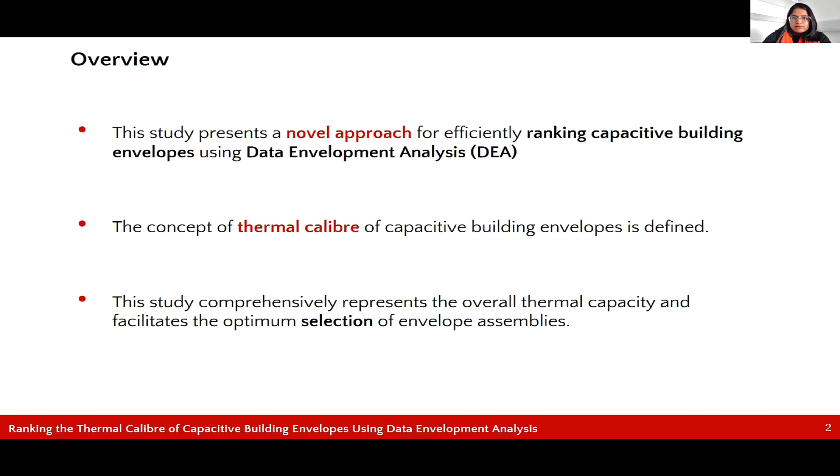The building envelope acts as an interface between the outside and the inside, and both aspects of resistance and capacitance of the material layers impact the building performance.

High thermal mass materials are known to be effective for locations where the daily temperature difference is greater than 10 degrees centigrade, where an alternate phenomena of heat gain and heat loss occurs at the building interface.

The advantages of high thermal mass have been presented by previous studies: Balaras in 1996, Childs in 1997, and Yang and Li in 2008. These are basically in terms of reduced temperature fluctuations, reduced loads, and reduced need for cooling.

Previous researchers have also tried to quantify the thermal capacity of envelopes and introduce them in thermal performance assessments, such as the Dynamic Benefit for Massive Systems (DBMS), which describes envelope performance in terms of climate and material configuration. This was presented by Kossecka and Kosny in 2002 and 2015 using US building assemblies.

The second study was Mass Enhanced R-value, also used in the Building Code of Australia, which describes the ratio of R-value for massive constructions for a specific load compared to the R-value in a specific location.

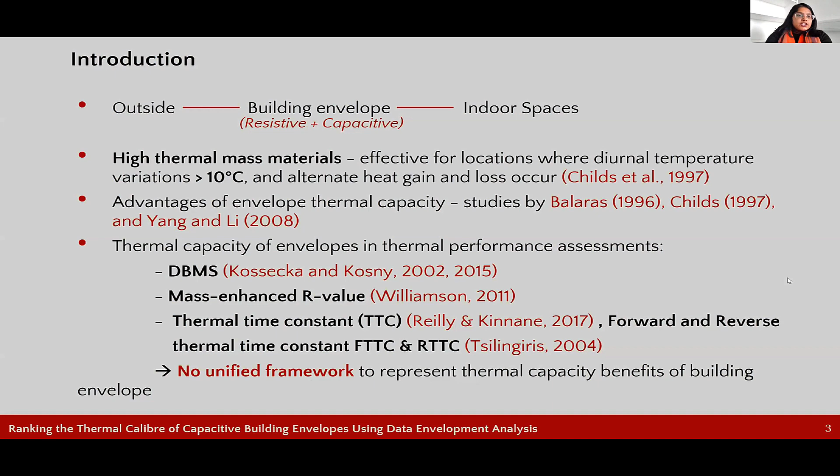In my work, I have performed this study for Ahmedabad, India, located at latitude 23.04 degrees north and 72.46 degrees east. This is classified as BSh, hot semi-arid steppe climate, according to the Koppen climate classification.

In order to capture the seasonality in the weather data, a two-step clustering was done based on the daily maximum temperature, daily minimum temperature, and global horizontal irradiance, using the typical meteorological year ISHRAE data. Four clusters were obtained, and the clusters are fairly balanced, as can be seen from the cluster sizes and the different values for the considered parameters.

Also, from previous studies, we know that thermal mass is not beneficial in colder climates. So clusters representing cooling dominant days are used for the study, which are clusters 1, 2, and 3, and cluster 4 is not used in the study.

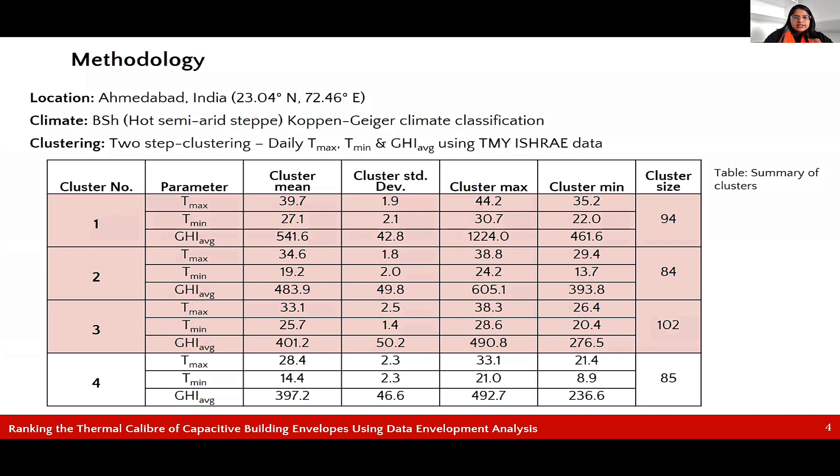In order to do the simulations, we needed a model. A 9-meter square room was modeled, with 2 windows on 2 adjacent surfaces with a window-to-wall ratio of 10%. The window is 6mm clear glass. The software used for modeling was ESP-r, and the room is naturally ventilated.

A fluid flow network was modeled to represent the airflow pattern based on the ambient air velocities. A room flow node was considered, which was connected to the outside node through the fenestration components, and the ambient air velocity was used as the inflowing air component.

Windows are supposed to be open when the outside temperature is greater than 28 degrees centigrade, and otherwise they remained closed. So 4 scenarios were considered, basically single exposed scenarios. For each simulation, only one facade was considered as exposed, and all other surfaces were considered adiabatic. The facade considered as exposed had a window. The figure on the right shows the configuration of the model for the south orientation.

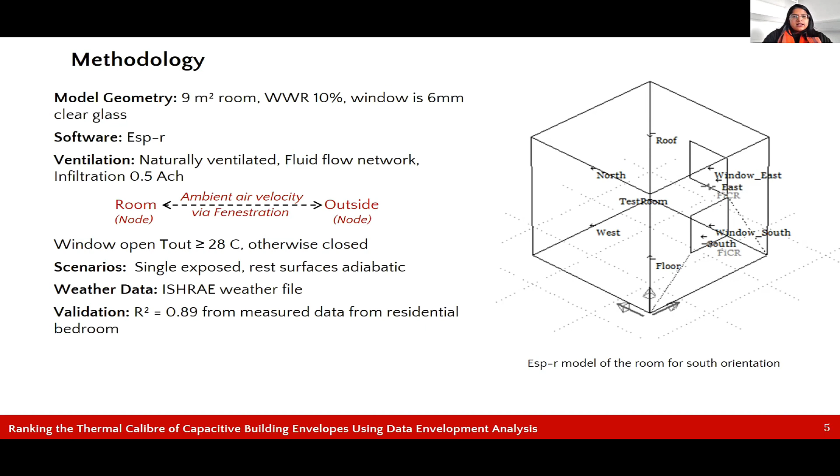We considered a 300 mm wall, divided into 3 layers of 100 mm each, and each of these 3 layers can take up materials. We also considered 3 materials, which were selected from existing construction materials used in Indian construction of residential buildings.

These materials correspond to high and medium thermal mass materials. The properties of these materials are shown in the table. Material A corresponds to a high thermal mass material, while materials B and C correspond to medium thermal mass materials. When we consider the envelope as 3 layers of 100 mm each, we get 27 possible cases, since each layer can take up any of the 3 materials. Possible cases include AAA, AAB, AAC, and so on, giving a total of 27 cases.

For these 27 cases, we get a thermal transmittance, or U value, range of 1.76 watt per meter square Kelvin going up to 3.03 watt per meter square Kelvin, and a TTC range of 22.11 to 35.88 hours.

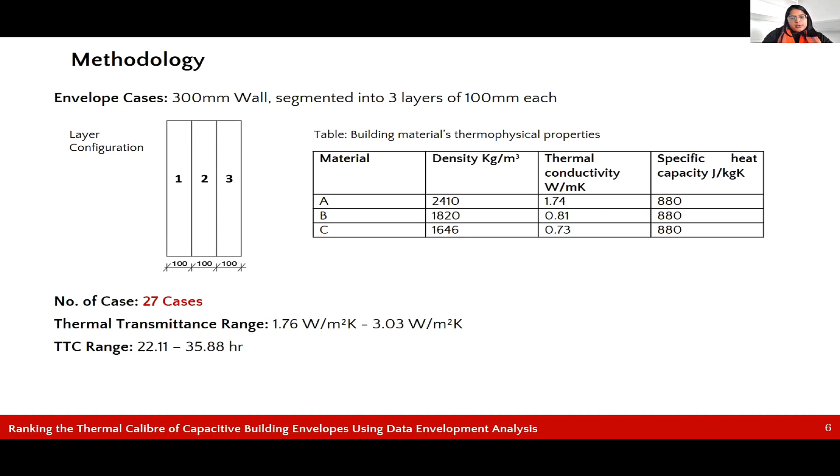Data envelopment analysis, or DEA, is a non-parametric, non-statistical mathematical model which uses linear programming to measure the relative efficiency of decision-making units. Basically, decision-making units are the units which are considered for ranking.

What DEA does is basically assign weight to each of the inputs and outputs, and the inputs and outputs are selected by us based on the criteria on which they are supposed to be ranked. Efficiency is defined for each DMU as the ratio of weighted outputs to weighted inputs, and it can lie between a range of 0 and 1, with 0 being least efficient and 1 being most efficient.

The thermal caliber for building envelopes is defined as the ratio of envelope performance, resistive and capacitive, on a particular day to its best performance in the year.

Using DEA, we have the advantage of comparing the performance of a material on a given day to its performance in the year, and comparing the performance of an envelope on any day to the performance of other envelopes on other days. In that sense, we can compare the performance of different envelopes on different days within each other, giving us a relative ranking for these envelopes.

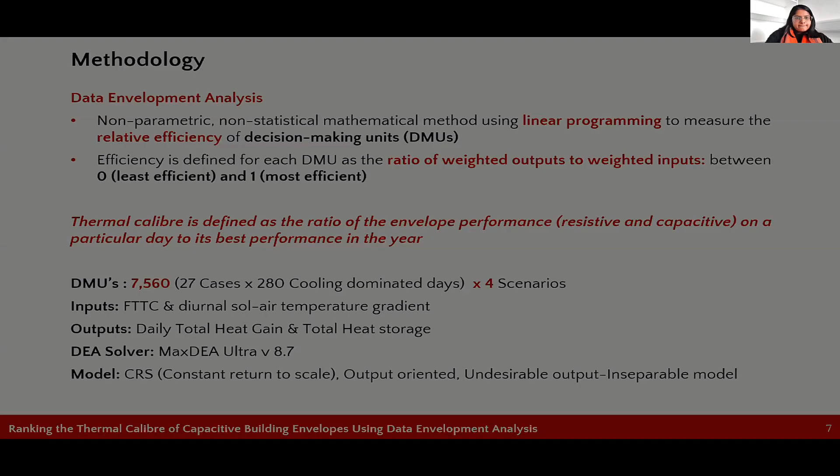So the methodology in a nutshell is basically clustering of weather data based on daily Tmax, Tmin, and global horizontal irradiance to get the cooling dominant clusters.

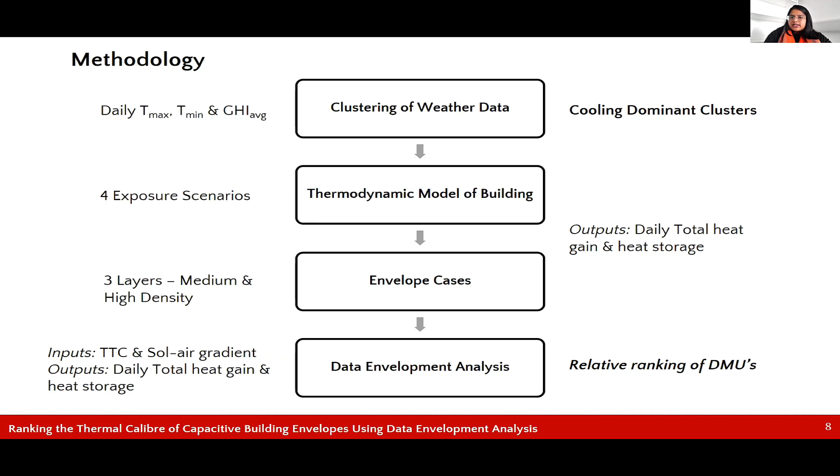Then modeling the thermodynamic model of the building for the 4 different exposure scenarios, and simulating the developed model for the 27 envelope cases, developed based on 3 layers corresponding to medium and high density materials, to get the outputs, which are then used in the data envelopment analysis to get the relative ranking of DMUs.

So also the effective position of thermal mass is important when we consider the capacitive envelope. For envelopes which have the same thermal transmittance, which is so because we made cases based on 3 materials, a lot of cases have the same U value.

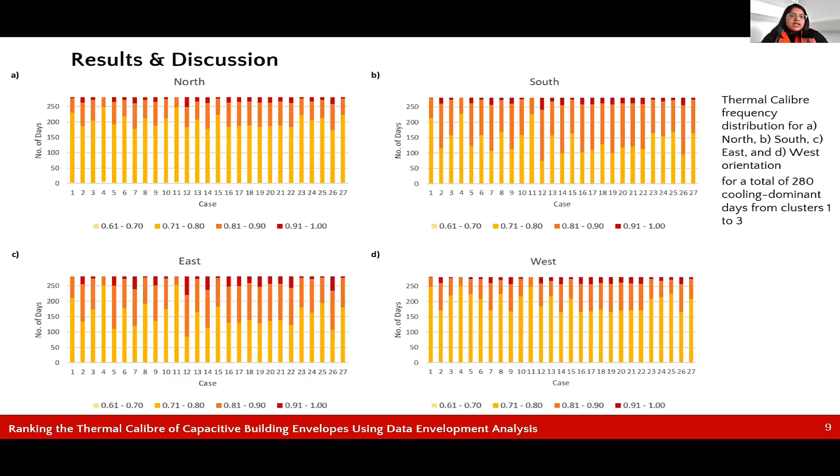For example, case 3, 4, and 5 have the same thermal transmittance or U value. But we see that case 5 performs much better in comparison to case 3 and 4, primarily because case 5 has a higher external thermal mass composition.

This is because high thermal mass materials absorb the heat entering the building, hold the heat, and then release it back outside. But if the external layers are made up of low thermal mass materials, the layer is going to saturate and will allow the heat to go inside.

Also, when a high thermal mass layer is sandwiched between medium mass layers, it performs better because the middle layer will absorb heat and hold it for some time before letting it inside. This is contradictory to when a medium mass layer is sandwiched between 2 high mass materials, which performs poorly, as seen in certain cases. You can read more about these cases in the paper.

Now, next we look at the pixel chart, which shows the efficiency of the envelope for the year.

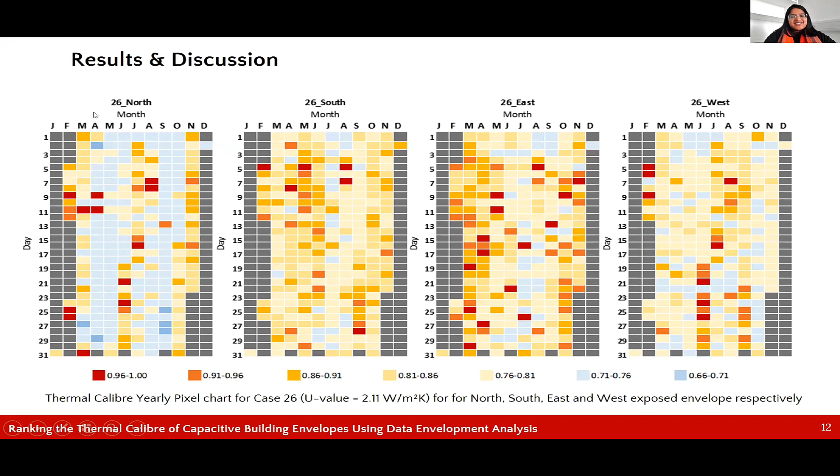Yes, so in conclusion, we have looked at the thermal storage capacity, which is often a neglected factor in building performance assessments. Building performance, being dynamic in nature, is influenced by layer configuration, material properties, and envelope orientations. These are all considered in the thermal calibre calculations, which give due respect to thermal resistance as well as thermal storage. Also, the efficiency of building envelope varies for different orientations, and it is not a constant value but a dynamic one, as seen by the efficiency values throughout the year.

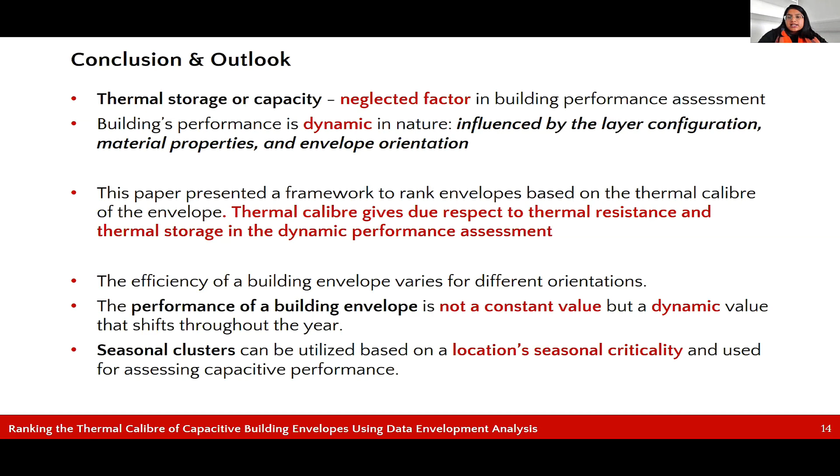Seasonal clusters can be utilized based on a location's seasonal criticality. So if the study is extended to other locations, you can focus on certain seasonal clusters which are more critical for that particular location for assessing the capacitive performance. Thank you, and sorry for extending the time.

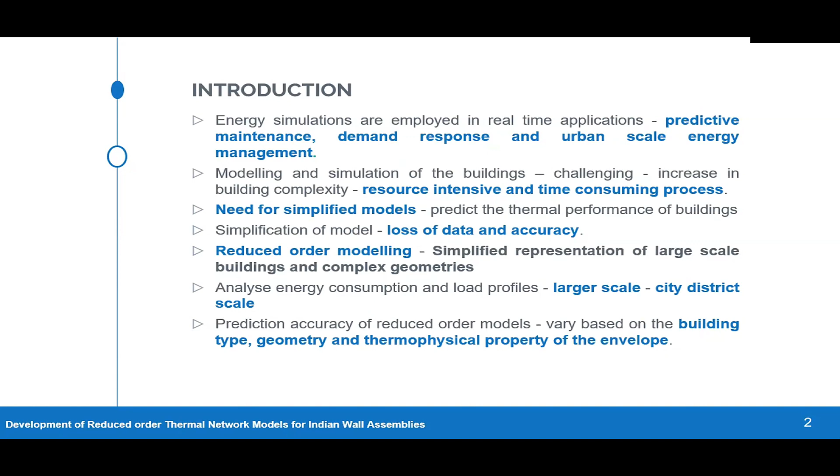One promising solution is reduced order modeling, which is basically a simplified representation of large-scale buildings and complex geometry. It helps us analyze energy consumption and load profiles at a larger scale, such as city or district scale. Prediction accuracy of reduced order models may vary based on the building type, geometry, and thermophysical property of the envelope.

The study presents an application of reduced order models, particularly thermal network models, for a residential building considering 3 alternate wall assemblies. The objectives are to develop a validated thermal network model of a building and evaluate its application for 3 different wall assemblies, and to present the effect of model order reduction on prediction accuracy. The study is limited to thermal network models of 3 widely used assemblies in India: aerated concrete, brick, and rubble masonry.

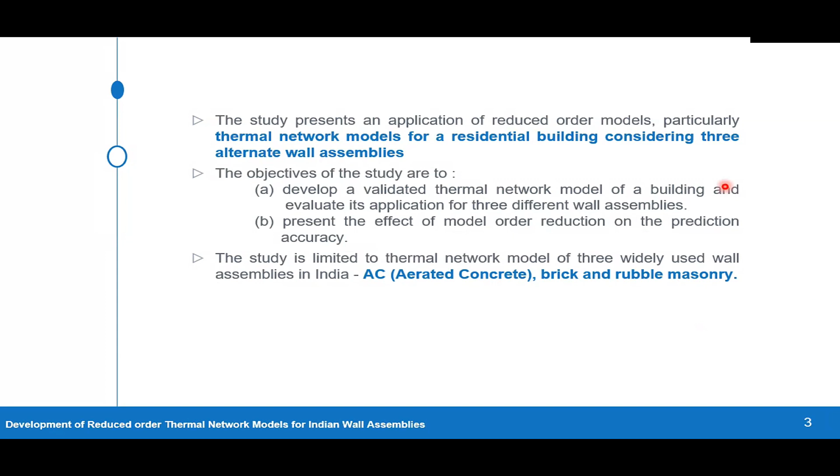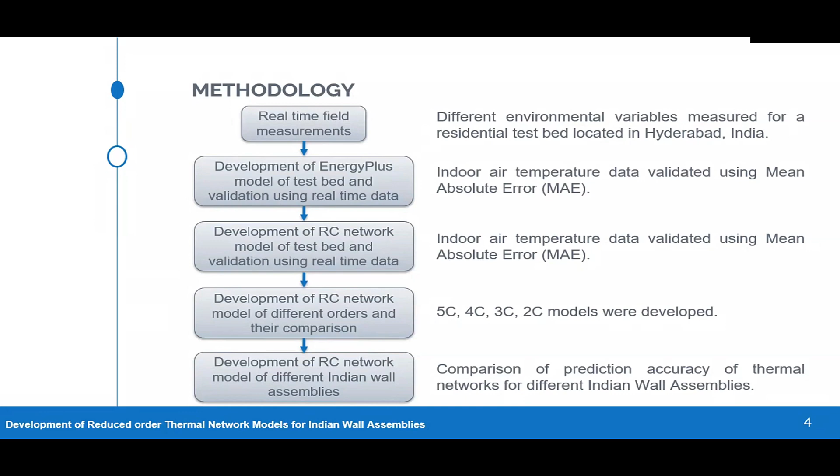The methodology adopted for the study is as follows. First, we did real-time field measurements for a test bed located in Hyderabad. Then we developed an EnergyPlus model of the test bed and validated it using real-time data. Then we developed an RC network model of the test bed and validated it using real-time data. Then we developed RC network models of different orders and compared their prediction accuracy. Finally, we developed an RC network model of the entire test bed for 3 different Indian wall assemblies.

So what are reduced order models? They are basically a simplified version of complex models. They require fewer input parameters and consider the effect of all the dominant parameters while neglecting the others. This significantly decreases the time involved in solving the differential equations.

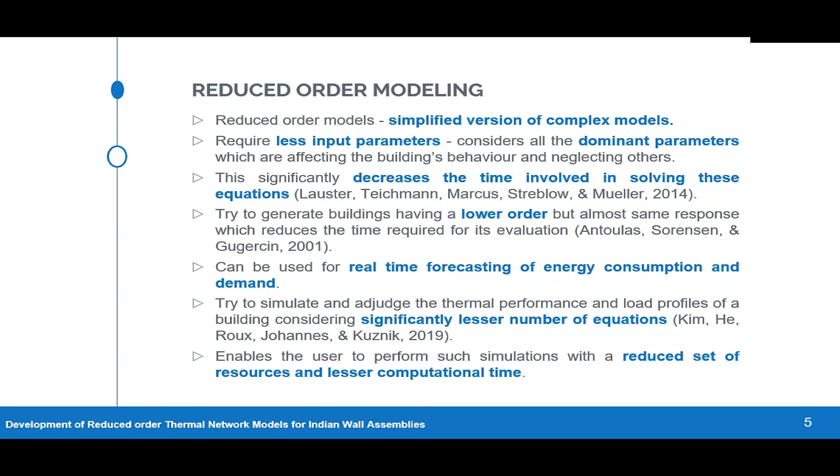They try to generate buildings having lower order but producing almost the same response, which reduces the time required for evaluation. They can be used for real-time forecasting of energy consumption and demand. They try to simulate and adjudge the thermal performance and load profiles of a building considering significantly fewer equations, enabling the user to perform simulations with reduced resources and lesser computational time.

Thermal networks or RC networks are a type of reduced order model which consider a building element such as wall, window, roof, etc. to be broken down into a number of elements, assuming they have a uniform temperature throughout. The number of such elements is usually kept small so that the order can be reduced. Thermal networks represent these elements using a series of resistors and capacitors.

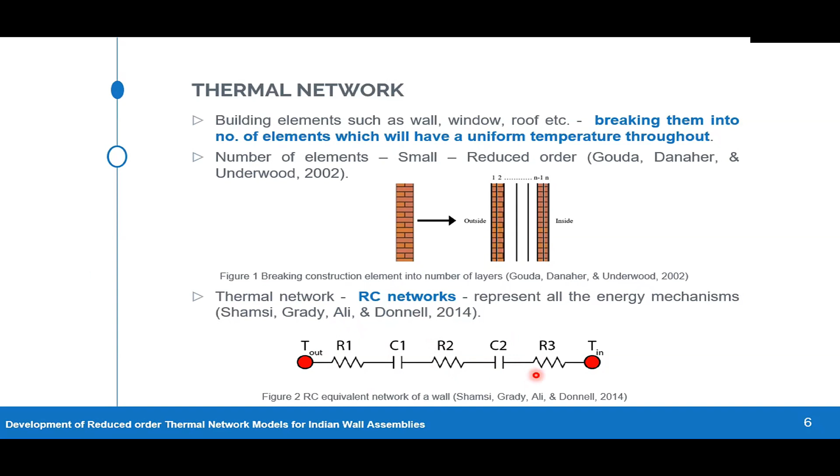Figure 2 represents a thermal network diagram of a wall, considering the wall has been broken down into two layers. R1 represents the resistance offered to the wall due to outside convection. C1 represents the thermal capacitance of the first layer of the wall. R2 represents the resistance offered due to conduction of the wall. C2 represents the thermal capacitance of the second layer of the wall. And R3 represents the resistance offered due to inside convection.

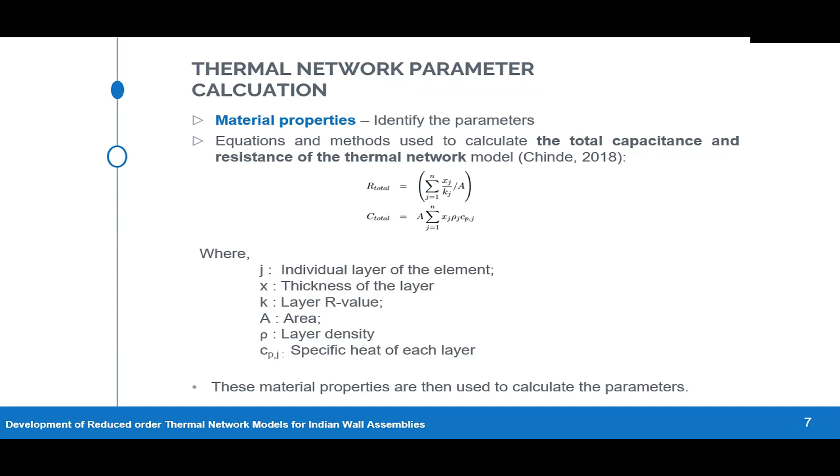The parameters of the thermal network model are usually calculated using material properties. It considers the thickness of the layer, the layer's R value, area, layer density, and specific heat capacity of each layer.

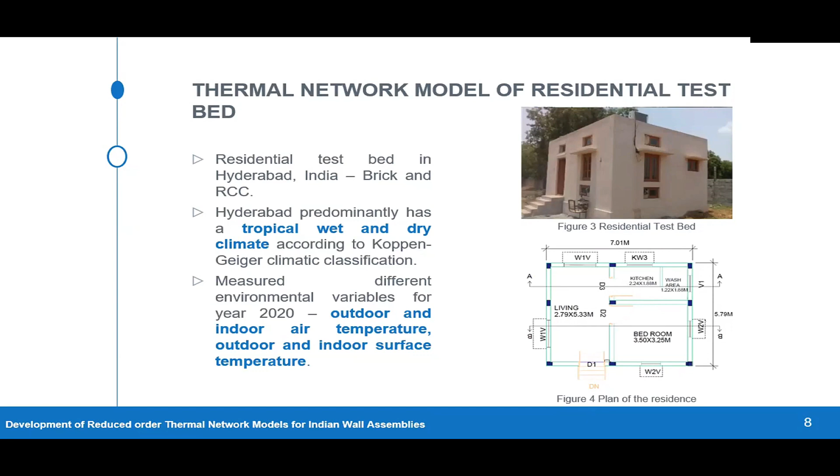Then what we did, we developed a detailed EnergyPlus model for the residential testbed, took one room, and tried to validate it by tuning the parameters. It yielded a mean absolute error of 0.82 degrees Celsius.

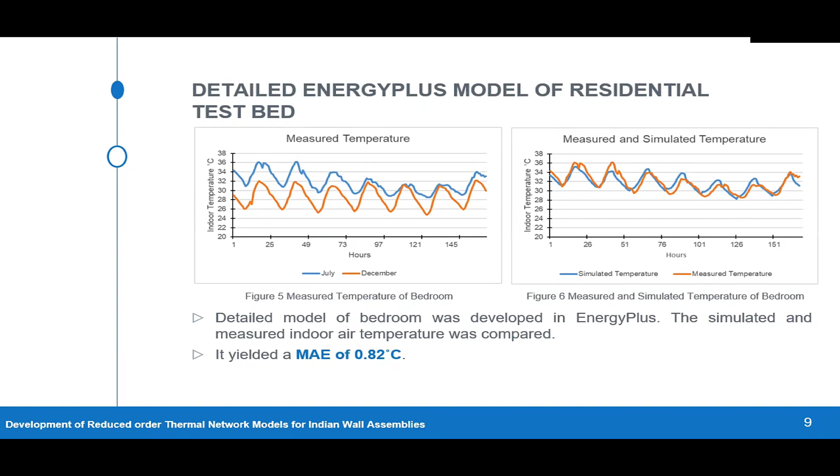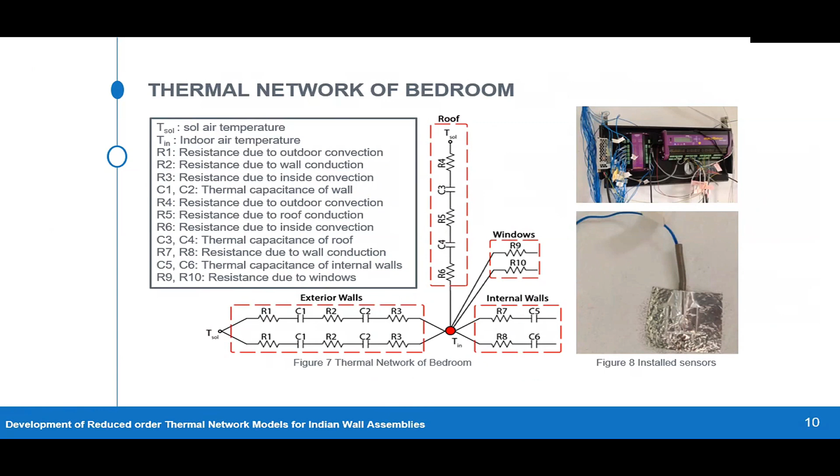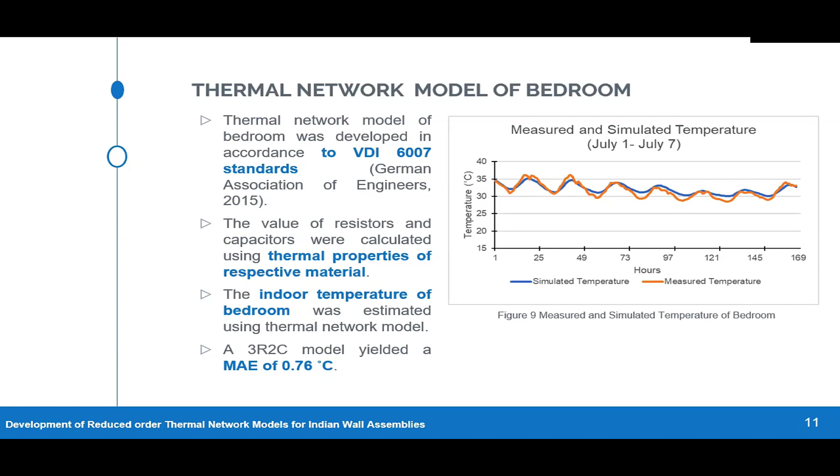Thermal network model of the bedroom was developed in accordance with VDI 6007 standards. The values of resistors and capacitors were calculated using thermal properties of the materials used in the testbed. So what we did, we basically tried to use the RC network to simulate the indoor air temperature of the bedroom, using a 3R2C model or second order model, and compared the simulated RC network temperature with the measured temperature. The model yielded a mean absolute error of 0.76 degrees Celsius.

An attempt was made to develop a thermal network model for the entire testbed for different Indian wall assemblies. So basically what we do is try to construct an RC network model for the entire testbed to simulate the indoor mean temperature. We considered 3 wall assemblies and models of different orders, which were 2C, 3C, 4C and 5C.

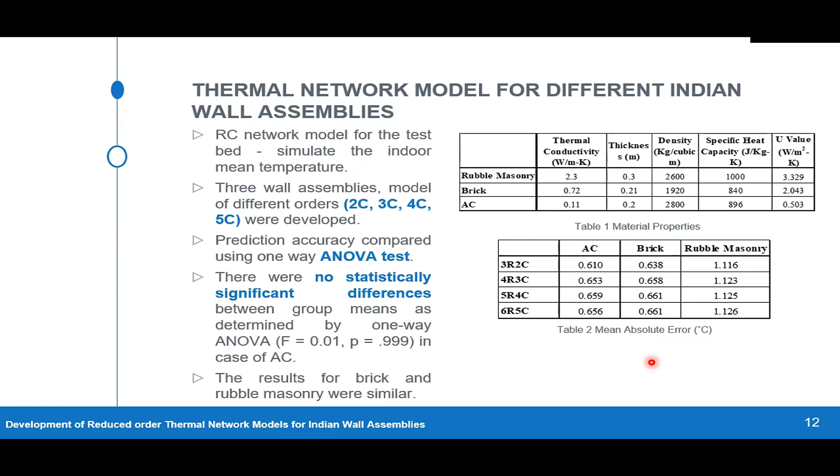Prediction accuracy of these different model orders was compared using one-way ANOVA tests. However, we found there were no statistically significant differences between group means, as determined by one-way ANOVA, in case of aerated concrete. The results for brick and rubble masonry were also found to be similar.

Then we developed an RC network model for the entire testbed considering aerated concrete wall assembly. For this we used a second order model, that is a 3R2C model. Then we tried to compare the thermal network model and the detailed model indoor air measurements. We saw that it yielded a mean absolute error of 0.61 degrees Celsius.

Then we tried to develop a thermal network model for the testbed considering brick wall assembly. Here also we used a 3R2C model, or second order model. We compared the indoor simulated temperature in case of the detailed model and the RC network model. When we compared, it yielded a mean absolute error of 0.638 degrees Celsius.

Now we try to develop a thermal network model considering the test bed to be made up of rubble masonry. Here also we used a second order model, or a 3R2C model. We tried to compare the simulated indoor air temperature using the thermal network model and the detailed model.

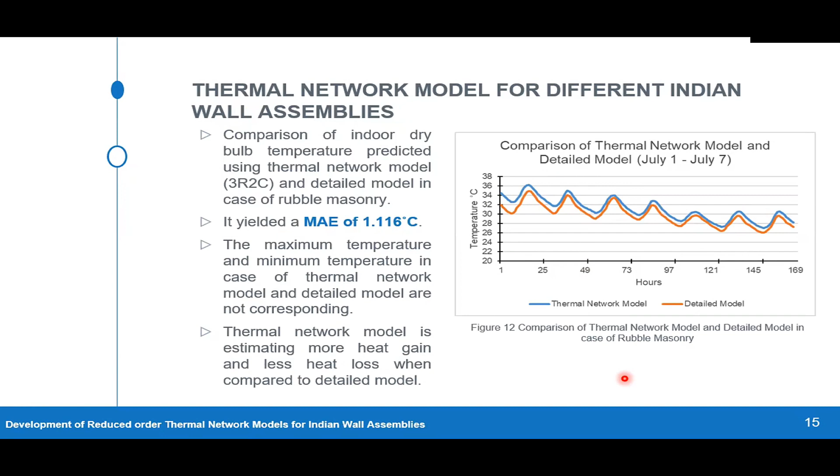We saw that it yielded a mean absolute error of 1.116 degrees Celsius. We can see from the graph that the maximum and minimum temperature in case of the thermal network model and detailed model are not corresponding or matching. Also, we can see that the thermal network model is estimating more heat gain and less heat loss when compared to the detailed model.

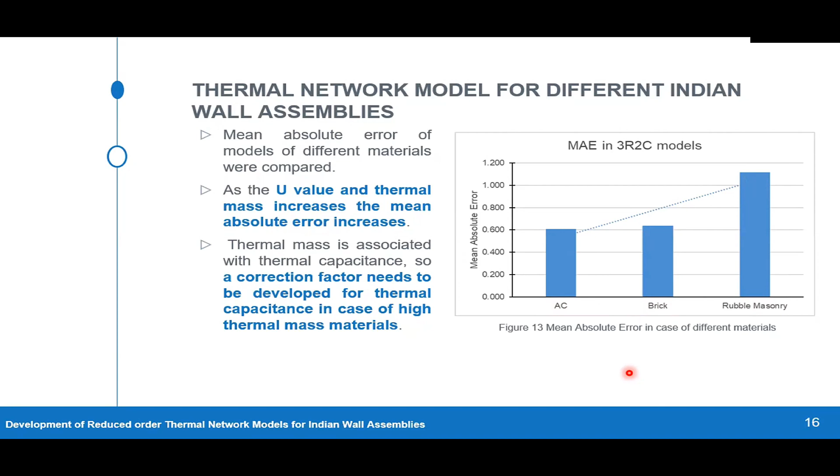Finally, what we try to do is compare the mean absolute error obtained by considering different kinds of wall assemblies. We can see that as the U value and thermal mass increases, the mean absolute error also increases. So we can say that the thermal mass is associated with thermal capacitance. Some kind of correction factor needs to be developed for thermal capacitance in case of high thermal mass materials.

Concluding the presentation, this study presented the thermal network model of three widely used Indian wall assemblies, which are aerated concrete, brick and rubble masonry. The thermal network model of the test bed was developed and validated, yielding a mean absolute error of 0.76 degrees Celsius. The mean absolute error of the second order thermal network model for the three wall assemblies ranged between 0.61 to 1.116 degrees Celsius.

The prediction accuracy of different orders was tested. No significant difference was found for the test bed under consideration; however, significant difference might occur with increase in building complexity and scale. The prediction accuracy of the thermal network model decreased with increase in U value, and was higher for low thermal mass materials compared to higher thermal mass materials. Further work is required to investigate composite wall assemblies and complex building geometries.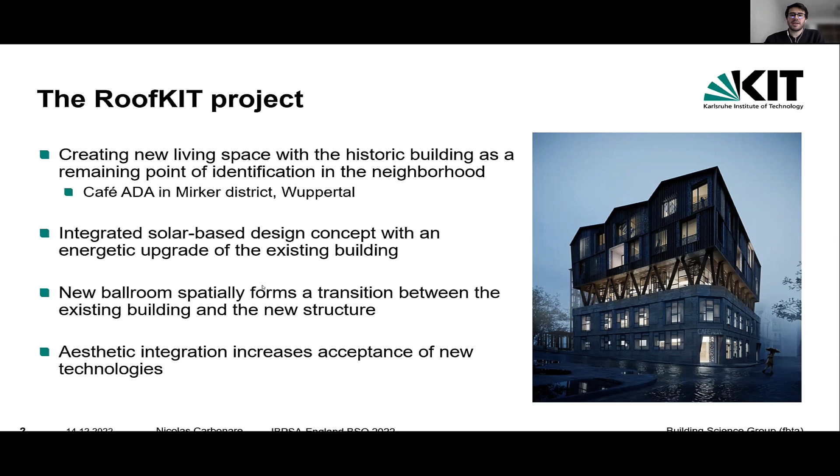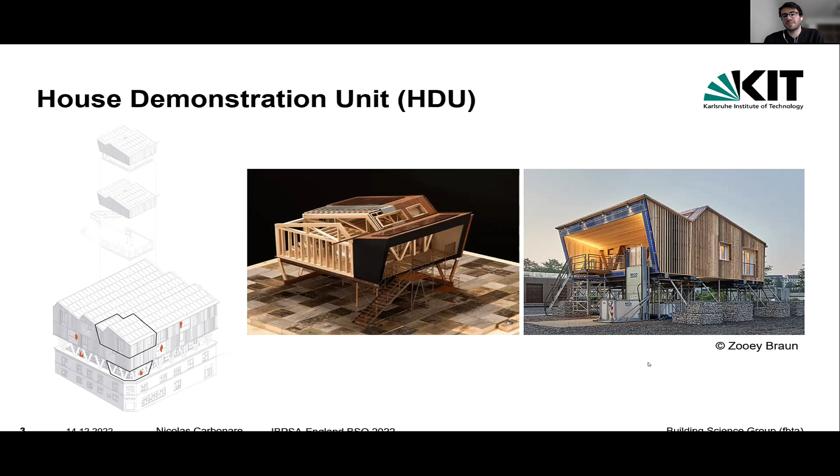But the competition was not only a design, it was also constructing the building for real in the solar campus. Of course, this building was huge and was not possible to be built in full, so what was built was a small corner, called the house demonstration unit. Here we can see how the small corner transforms first into a model, and on the right side, the real building that we built during the competition.

I will just directly dive into the energy concept of the house demonstration unit. It combines passive measures for high indoor environmental quality and different technical solutions that yield carbon neutrality over the year, so our building consumes the same energy it generates, around 60 kilowatt hours per square meter per year.

We combine high quality thermal insulation and ventilation with heat recovery systems to minimize energy losses in the building. Then we gain energy from the sun in the form of PVT collectors, which provide heat, water, and electricity at the same time. The electricity is used by the building, and we have an energy management system that maximizes the self-consumption of this generated solar energy.

And the hot water of the PVT system feeds a heat pump, which creates hot water as well for floor heating and domestic hot water consumption.

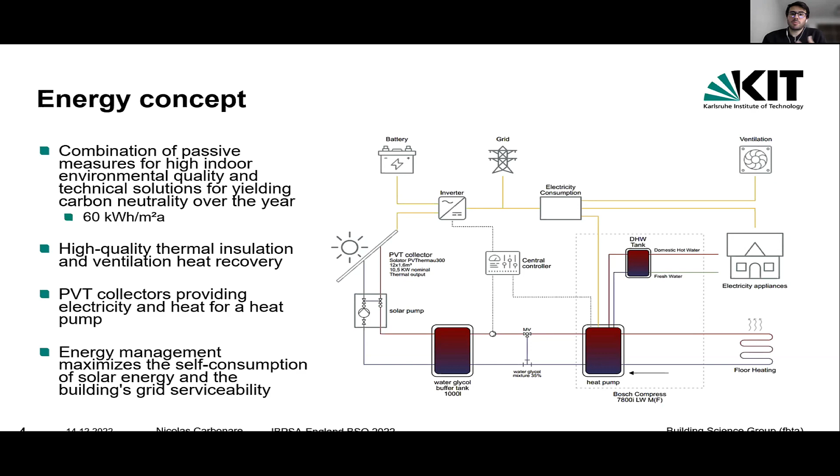One tiny little part of our work was to prove how this concept works in simulation. So our team of engineers and architects decided to perform a rather deep system simulation.

We decided to do the simulations using Modelica, as it is an equation-based language. This is rather easy for people who are not experts in building simulation, as you write equations and not deep code. The other advantage of using Modelica is the huge open source community, so we took advantage of different open source libraries developed by different research institutions.

These models were developed through two seminars in the lectures at the Faculty of Architecture at KIT, in collaboration with the University of Applied Sciences in Offenburg. So again, this whole simulation study had educational purposes. I will not get very deep into the Modelica models, but they are available freely on GitHub.

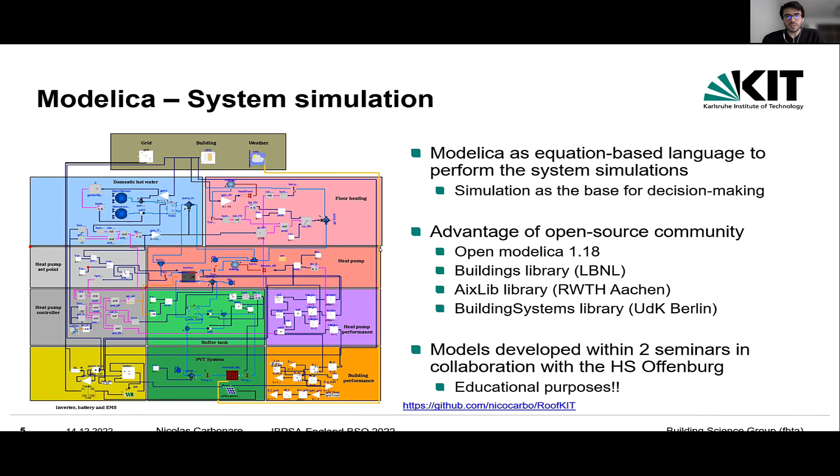So the main model, just a short summary: the building model follows the very popular ISO 13790, where we fit a model using 5 resistances and 1 capacity to represent the whole thermal mass of the building. We modeled the heat pump using the characteristic curve based only on the inlet heat source and heat sink temperatures, not on the mass flow.

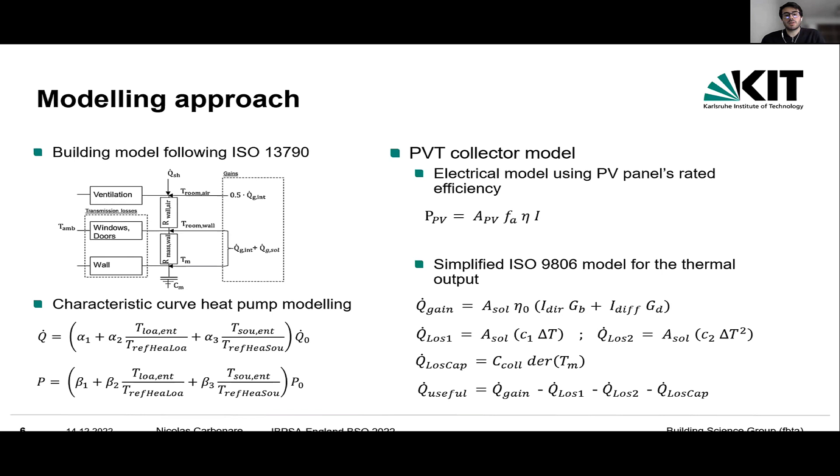For the PVT collector model, we use separate models for the electrical photovoltaic panel and the thermal part of the PVT. For the thermal output, we use direct and diffuse solar radiation, as well as first and second order losses and capacity losses of the collector.

Going shortly to the results, we can see on the left side the energy balance of the building. We only require space heating considerably in 5 months over the year; October is just a little bit. And we can see on the right side the electrical energy balance of the building.

The orange part is the consumption of the heat pump, both for hot water and space heating. In gray is the house consumption, which is rather constant every month. In green is the PV generation, which of course has the highest values in summer. This balance confirms that the house generates the same amount of energy over the whole year as it consumes.

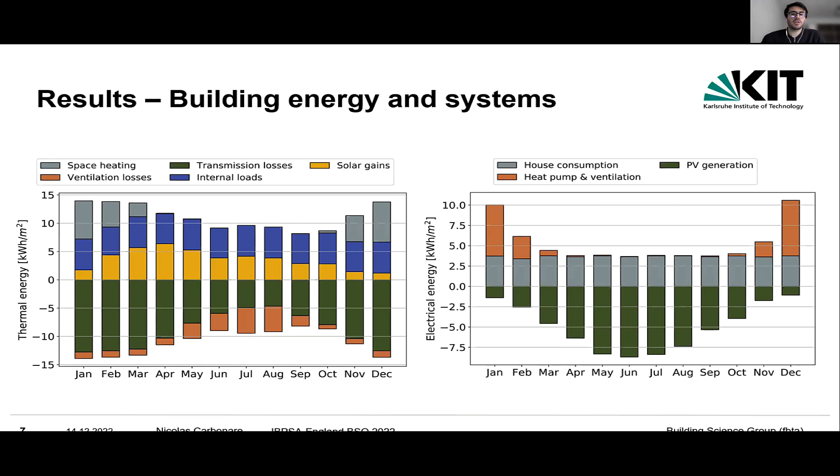Taking a sample day to see how our systems react, we can see on the left side the electrical power balance of a single day. This was in fall, I guess - yeah, in fall, because we have some space heating.

We can see the orange curve, which is the house consumption of energy. The blue curve is the power provided by the battery: when it's positive, the battery is being loaded; when it's negative, the battery is giving energy to our house.

In green, the PV generation, energy generation, and in gray, the energy consumed by the heat pump. We can see more detail on the right side that every day in the morning, the heat pump produces with a lot of spikes due to our self-developed control strategy. They produce hot water with very high COPs between 5 and 6, matching the manufacturer details. For space heating, we have a COP around 4, but in general the COP levels are very high as we use the PVT as the heat source for the heat pump.

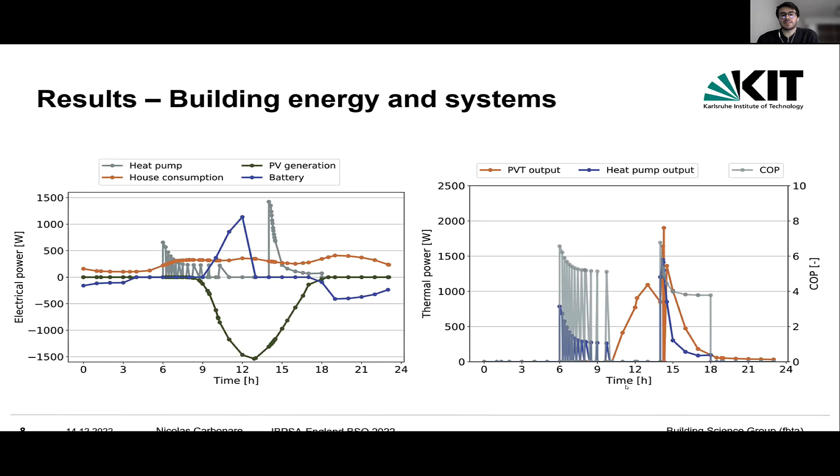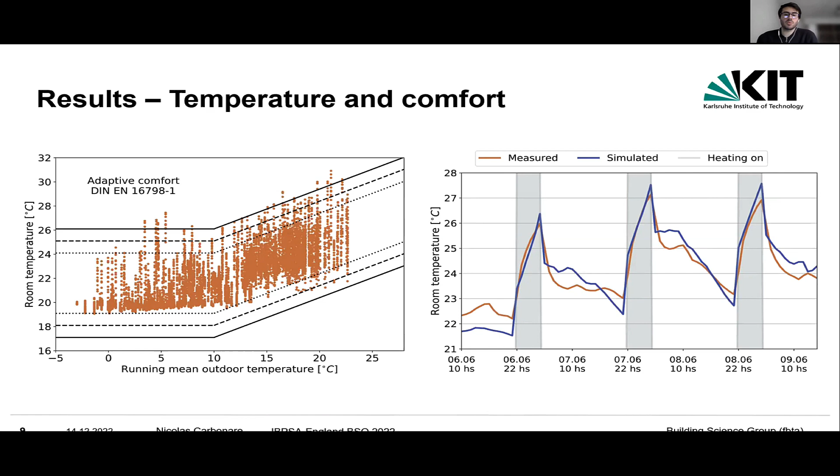In conclusion, we developed a building and system simulation framework for the educational context. We used these simulations with students from different backgrounds and professionals working together to achieve an overall concept, which was useful for taking decisions at different levels. That leads to our second conclusion: we used building simulation as our main decision-making tool in a real building design, applied to the building envelope, night ventilation, the control strategies for HVAC systems, and so on. This was just a simple part of the whole simulation work during the team's efforts.

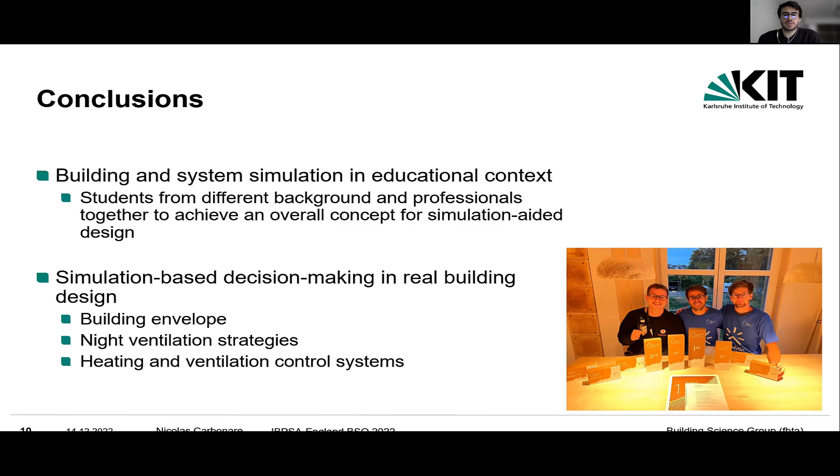I want to thank you all for your attention. We are glad that we could win the competition, and our building simulation efforts were highly considered by the jury during the whole competition. If you want to take a look at our website, our Instagram, or our building simulation models, they're all freely available on the internet, and I hope this is also extendable to other educational purposes. Thank you.

Thank you, Nicolas, for your presentation. I would like to congratulate you and your group for using Modelica. It's not so easy, you need to know a lot of programs and how to build the scripts and stuff like that.

Yes, and in 2019 we also participated with our group here in Brazil in the Solar Decathlon in Latin America, which was in Colombia, and it was really difficult as well, but we won first place there too. As you said, you have to build your house, so it's really difficult because first you need to simulate, understand, study and design everything, and then you go to the site and build it, and it's really hard. I'd like to ask, if you can, what was the most difficult part in the whole process, in your opinion?

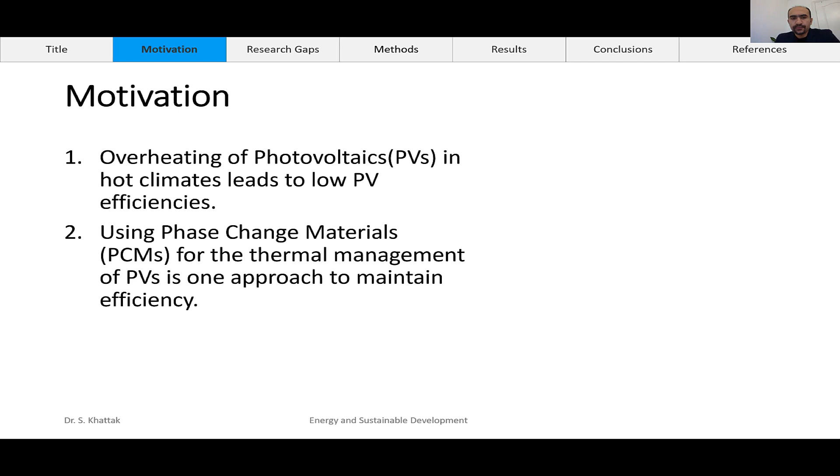But the problem with PCMs is that they're a double-edged sword, which can be seen from this experimental data set. This is the experiment conducted by Shivangi, which has a CPV with an integrated PCM on the back side, on the bottom side, and it was exposed to different doses of solar radiation.

And the efficiency data was recorded. We can see that the PV average surface temperature has quite a strong linear correlation with efficiency for the two kinds of panels, with and without PCM. The blue one is without the PCM, while the orange one is with the PCM.

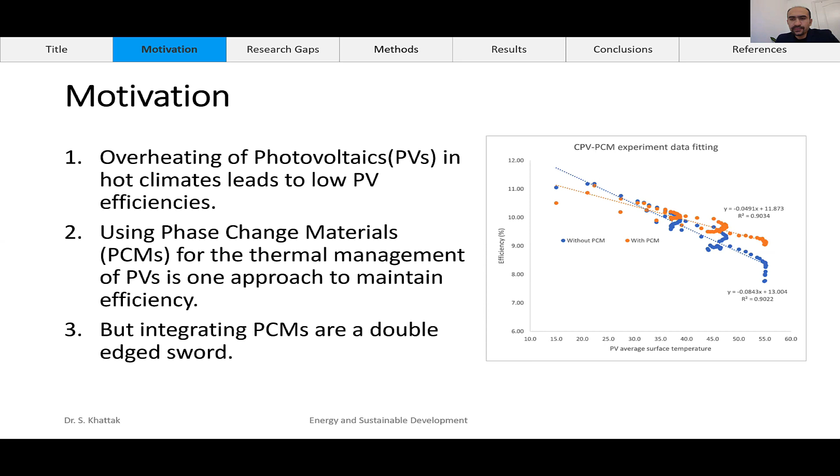So this was the data acquired in the experiments, and we thought, could we possibly use a typical building energy modeling tool to assess this performance at different weather conditions. So that's where the research gaps came up.

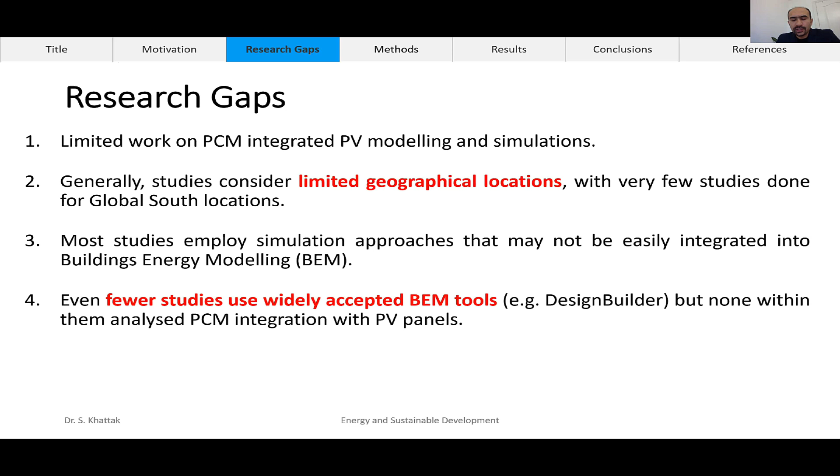There was limited work on PCM integrated PV modeling and simulations. Generally, even the work that was done considered limited geographical locations with very few studies in the global south. Most studies that employed simulation approaches did not use typical building energy modeling platforms, such as Design Builder, Energy Plus, or similar.

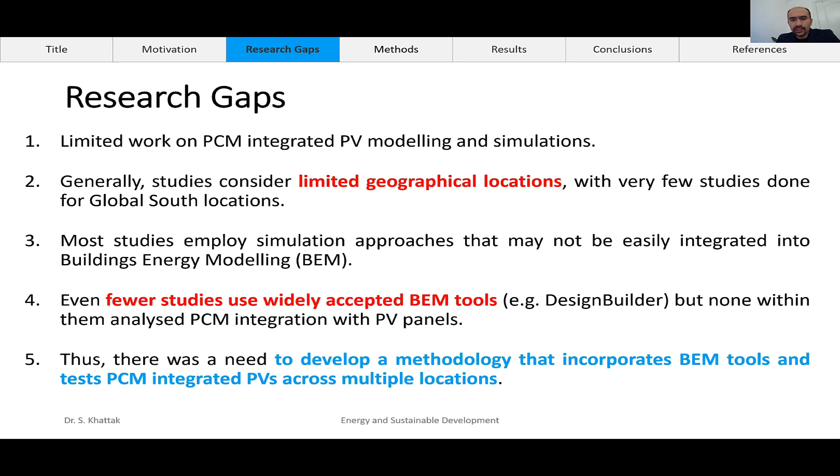So we saw there was a gap to develop a methodology that incorporates these BEM tools and test PCM integrated PVs across multiple locations. That was the kind of gap we identified to develop this methodology.

So this was what was developed. It's basically a co-simulation approach, but before this was done, from the Energy Plus weather data, a total of 885 global south locations were identified. The weather files were downloaded and then filtered based on two criteria.

The peak summer temperature should be in excess of 25 degrees centigrade, because if it's not hot enough, there's no point trying to use the PCMs, since PV efficiency drops at hot temperatures. The second condition was that the monthly average diurnal swing should be at least 10 degrees centigrade, to allow the assumption that PCMs would be charged and fully discharged over a cycle of a day.

With this filtration of the weather data, we identified 128 locations, which were then simulated using the co-simulation approach managed by MATLAB. MATLAB managed the BCVTB, which is an interface connecting Energy Plus to MATLAB for any kind of simulation work not already available in Energy Plus.

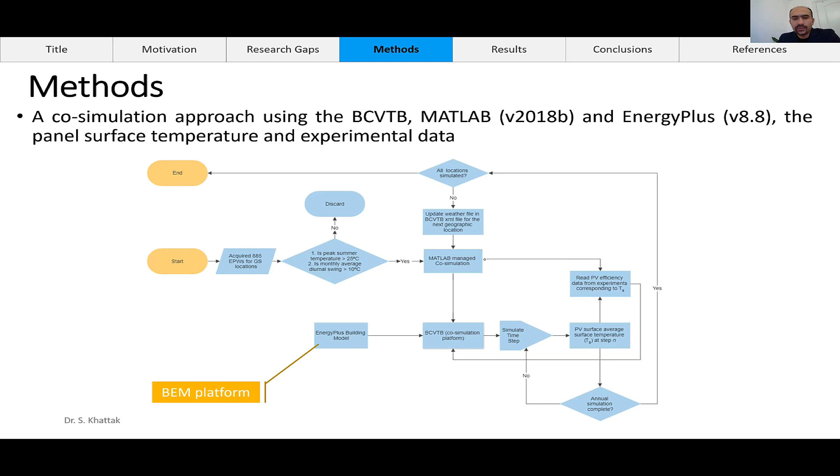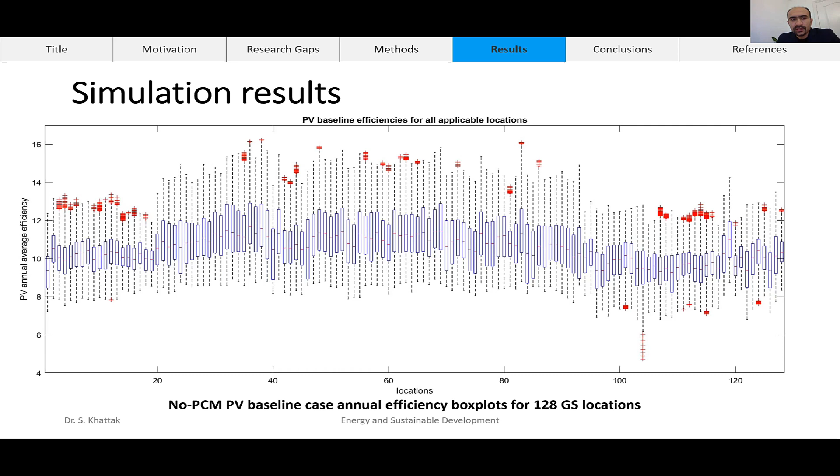So this was done without the PCM and then with the PCM to see what is the difference in the efficiencies. And this was plotted in this graph over here.

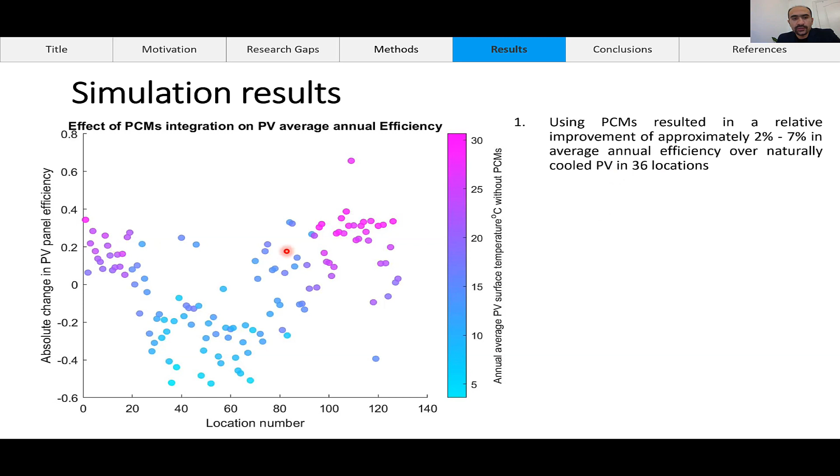It is relatively from 2 to 7%, and it occurred over 36 locations. So for the locations which have a positive improvement, that is 36 out of the 128.

For the colder climates, we see that the efficiency reduced. The worst case is location number 52, which was Dong Ujimqin Qi in China. And in that specific case, the efficiency reduced from 11.41 to 10.88 on an annual average.

And that's evident because if it's generally a colder location, then even the experimental curves, we see that there is this threshold in surface temperature, which only after that threshold do we have an improvement in efficiency with PCM.

For the best case scenario was a hotter location in India, Hissar, location 109 on the x-axis, and the efficiency went from 9.26 to 9.92. So that was the best case, but we can see that there's just one data point over here.

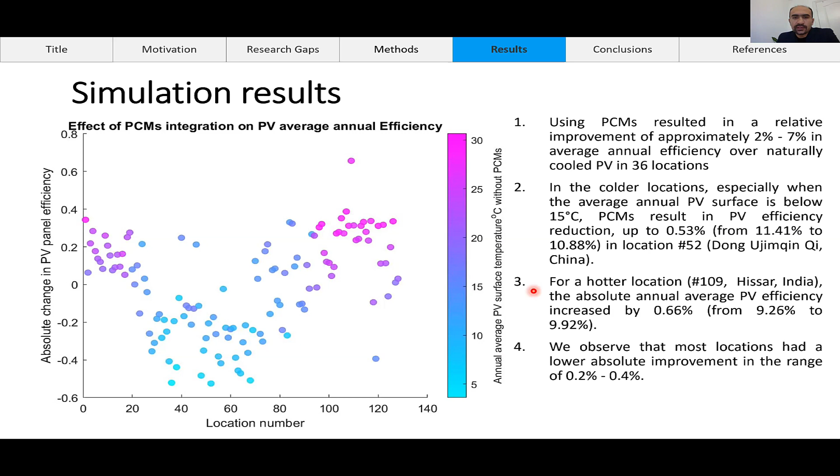Most of them lied between 0.2 and 0.4% absolute improvement. So this kind of tells us what the analysis reveals for the multiple locations. But let us look at the best and the worst case scenario to understand a little bit more.

So this is the best location where it was Hissar, India. And we can see on the right-hand side, this is data from several days in April, and only daytime data, obviously, because that's when we have sunlight. And the blue trace is without the PCM, and the orange trace is with the PCM.

And we can see that the orange trace has smaller fluctuations in the PV efficiency, and that is acceptable and sensible, because the PCM's efficiency improves when it's peak summer, peak afternoon. So we can see that it doesn't drop, the orange trace doesn't drop as much as the blue one.

But in the early dawn, or maybe late eve, just when the sun is about to set, the PCM actually does not do what we need. It reduces the efficiency. The orange trace is lower. So we see the smaller amplitude of this orange trace, and that's what we would expect with the PCM.

It's also reflected in the annual histogram on the left side, which tells us that with the PCM, the data is more compressed, lower standard deviation, and a slightly better improved mean as well. So it tells us that it is giving us more consistent performance.

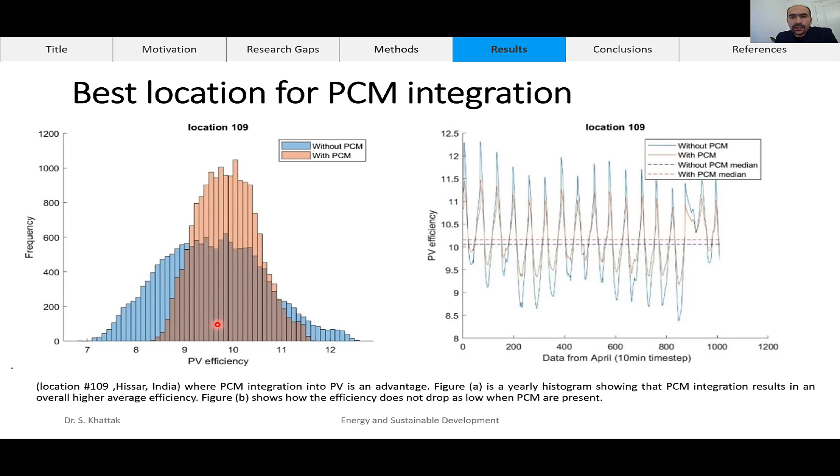As compared to the worst location where the amplitude is still smaller, because that's what we expect the PCM to do, but it's also simply lower than the case without PCM, because it is making it warmer. And we can see that reflected in the annual histogram as well on the left.

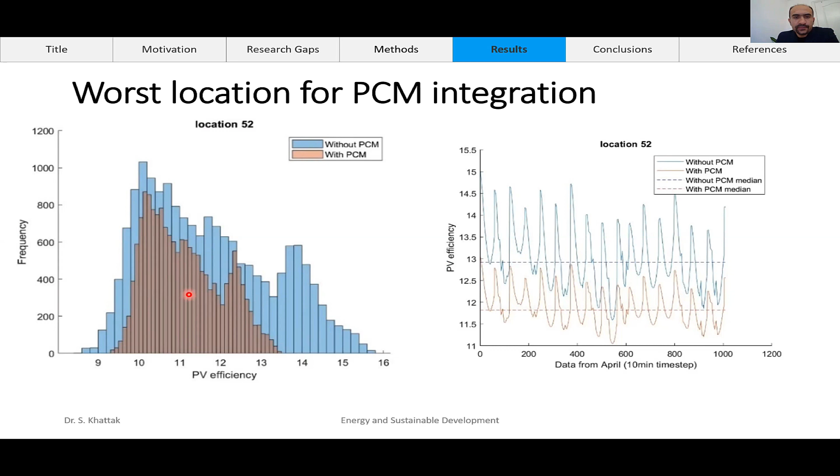So what are the conclusions? Of the total of 885 locations based on this methodology, 36 were identified which could have some potential of employing PCMs for improving the efficiency of PVs.

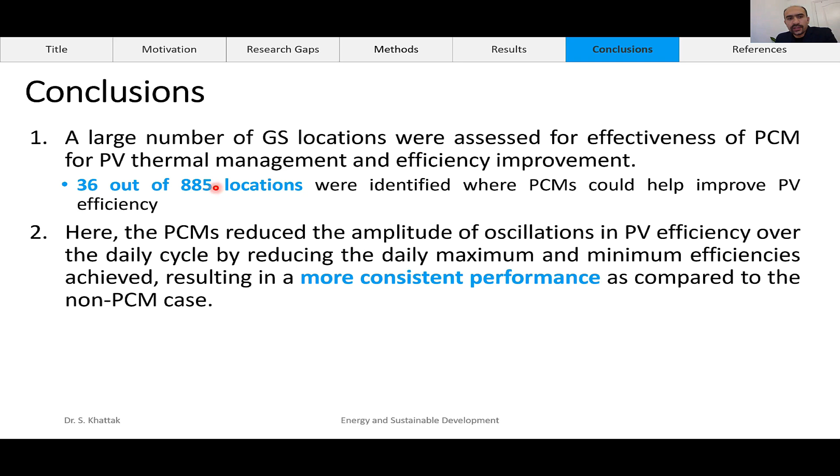Then we saw that the reason where it was giving that improvement was because of more consistent performance, lesser fluctuations in efficiency as compared to without the PCM case.

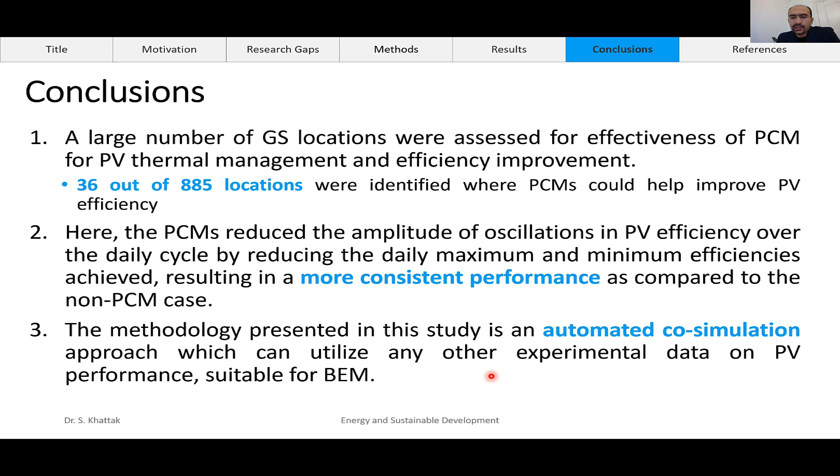And this study employed an automated co-simulation approach, which means that you can set up several buildings and multiple locations and press play, and it will generate all those simulations and results, by incorporating the experimental data, coupling the experimental data of the PCMs with that of building simulation. So that was a key objective.

So are there limitations to this work? Yes. It was based on one experimental data set, one PV-PCM combination.

So the results may change for different PCM product or PV product or combination. Then inclination was not investigated. However, it should be easily done because it's simply a case of changing the inclination of the roof on which the PV would be employed in Energy Plus.

Then it could be extended to a larger set of locations. The electricity generation could be compared in addition to the efficiency, because if we have a balance of efficiency, the loss and gains balance each other out. For example, the gains in efficiency in the afternoon, if they balance the loss of efficiency in the early morning, then in efficiency terms they would cancel out, but not necessarily in electricity generation, because there may be more sunshine in the afternoon. So the results might be slightly different for electricity generation.

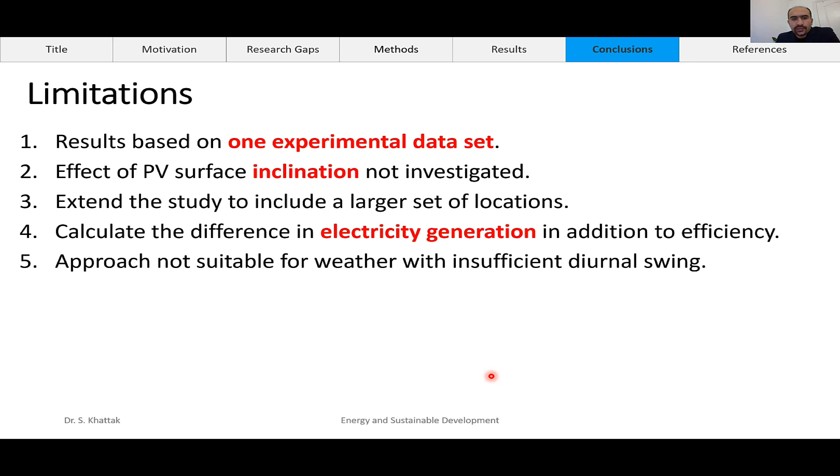And then with this approach, we had a constraint of considering locations with sufficient diurnal swing. That was because we didn't actually model the physics of the PCM. We coupled the experimental data to the building model. So that's what we did.

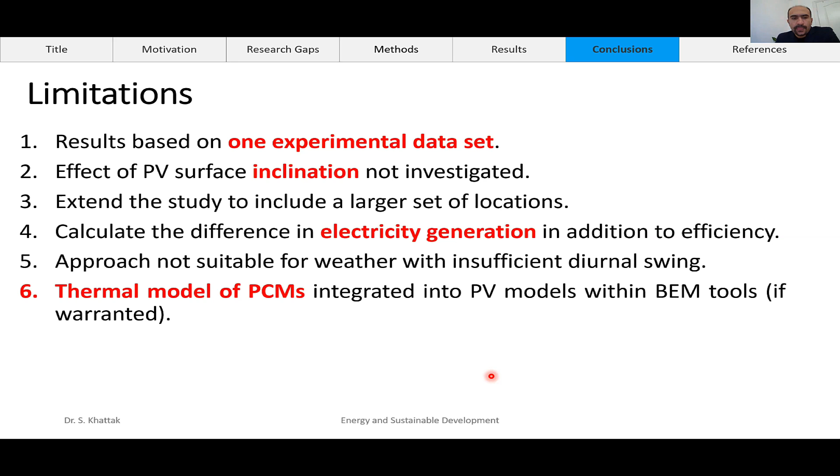And that is all. Thank you very much. Any questions?